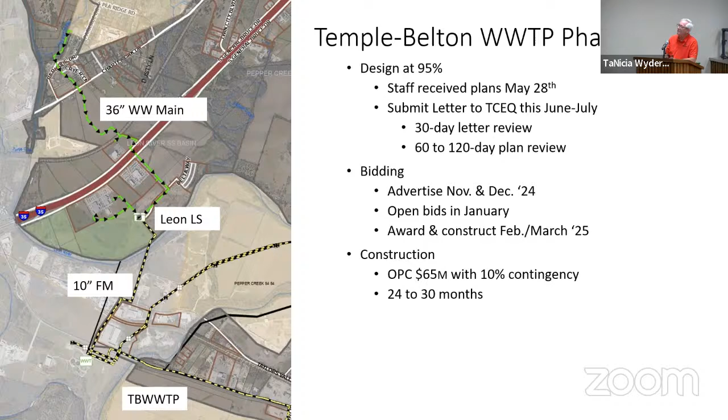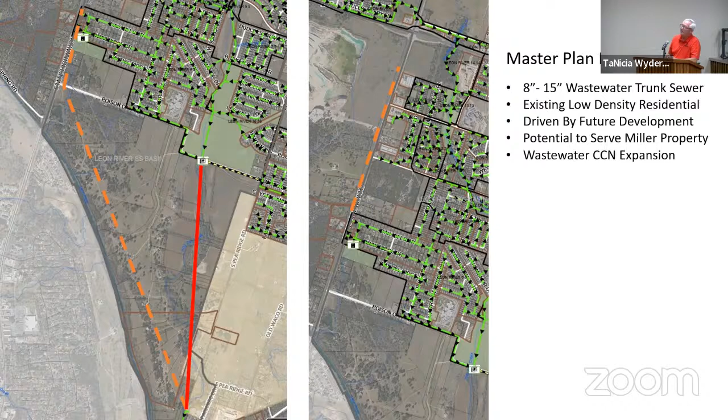So it changes the slide a little bit. You can see on the right-hand section portions of that property with the quarry up at the north end. One interesting thing about that ranch is only part of it is in the wastewater CCN for the city of Temple, and the reason is the topography. As you know, 317 is pretty much a dividing line for flows. If you're on the west side, it flows to the southwest and enters the river in a different portion, and doesn't really flow into the area shown on these exhibits.

And we had a wastewater project planned for this section, and then another one that extends north of Prairie View along 317. And that north section would serve what used to be the Bailey subdivision, has a different name now that's proposed, Preston Hollow. Now the lower one, the Lastovica property, we started design on that and started property acquisition.

We stopped because they weren't ready to develop. They wanted that line to go around their property, which didn't make any sense because it wouldn't provide any service. So we put it on hold pending future development on the Lastovica property.

I tend to go fast, so just slow me down if you want me to slow down and add any detail.

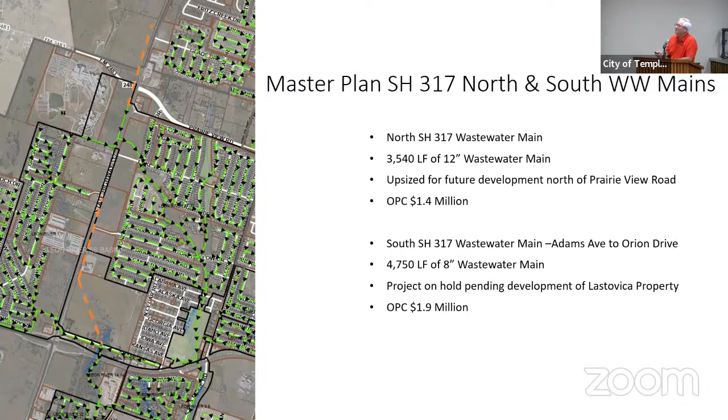This is in reference to the study I was talking about earlier. There's two subdivisions, North Pointe and Preston Hollow, that have plats in for approval. Actually, we have construction plans that are being readied to submit. You see the area of future development on 2483, and to the south, some more future development.

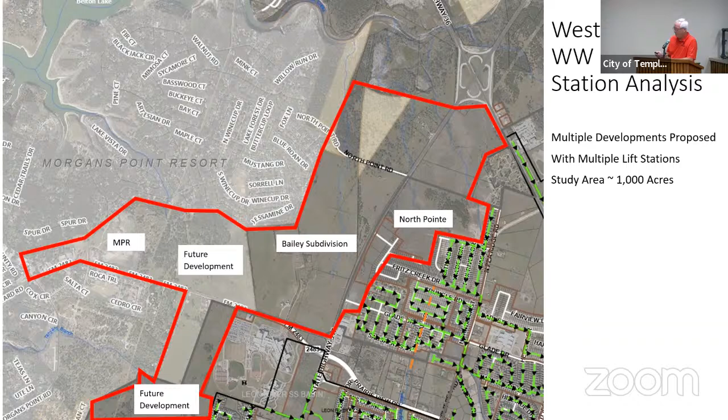And the interesting thing about this is we've been talking to Morgan's Point about providing service for their commercial area, their downtown area, so they can fully develop and their quarry could develop. And this whole study area is about 1,000 acres. So the study really looked at lift stations and how do we serve all these different areas.

And what the analysis did is, if we put it all in Leon, what would we need to do? If we put it all in Pepper Creek, what would you have to do? Or if we split it, what would happen? So the study ended up recommending putting everything in the Leon because it's better suited to handle the additional flows and requires less improvements than Pepper Creek.

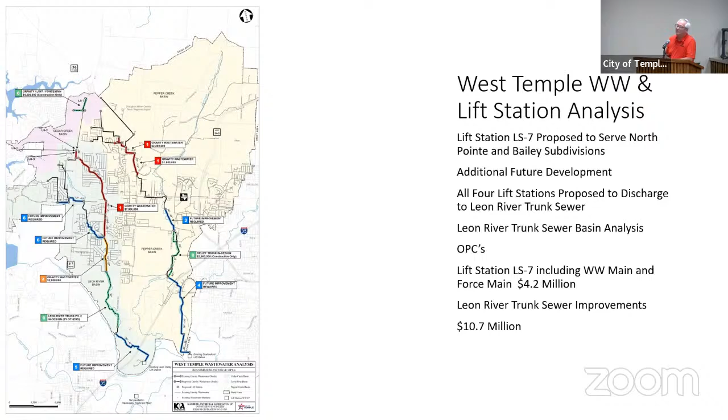I stuck this slide in last minute because it shows what I was speaking to earlier about dividing the directional flow from the basins. It's hard to see, but that is the 707-acre ranch property that it bisects. So everything to the left of that blue line heads in a different direction, off to the southwest, and anything on the east side can flow to 317 and be captured in our system.

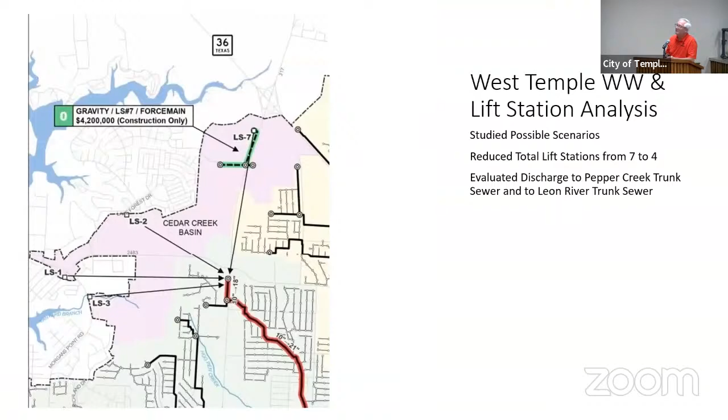So that was very quick. Any questions or anything you want me to go back over?

Was any of that study or analysis done during these last couple heavy rainfalls that we've gotten this year? Granted, that's an anomaly, but did we still get a lot at one time? I've only been here for 5 years, and every time it happens, we always have an issue somewhere. So was that evaluated during this process?

Yeah, so what happens with a lot of rainfall is I&I, infiltration and inflow, gets in the sewer lines and contributes to the flow. A few years ago, there were some flow measurements taken in a lower part of this basin, primarily from Poison Oak South, that quantify the effect of rainfall on the wastewater system. And those numbers were incorporated into the analysis that's just completed. So, yeah.

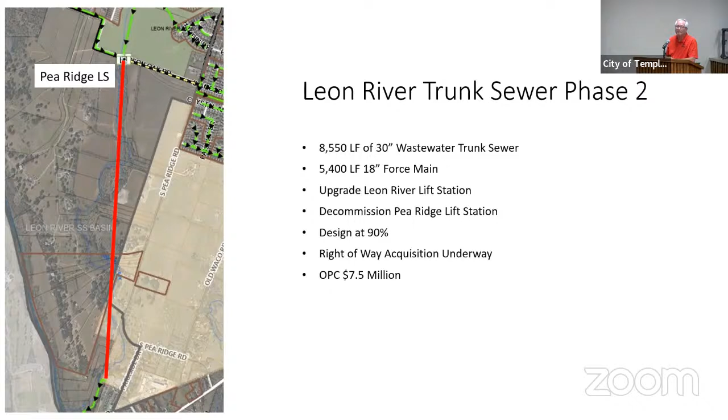Outside of this particular presentation, but it got me thinking with some of the developers seeing off of 93, I know there's some flow issues along the central point there between like 31st and 5th Street in there. Is there a master plan for anything going on in that region?

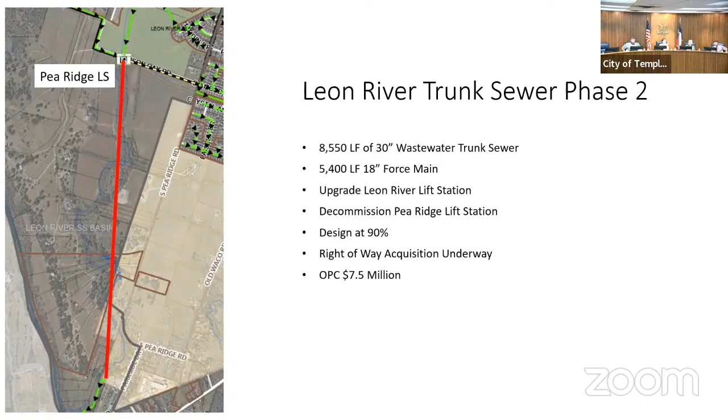The last one that came through, I think was 600 homes around the elementary school. There is, and I'll just refer back to this master plan.

So it's another one, it's just developer driven, of course, but there is a plan. Yeah, okay, I missed that on that slide, so thank you.

So given what we know is coming development wise, and assuming you guys have seen every one of those drainage flow plans, is the city set up to handle the growth that we've approved or that we've put forward to city council at this point? Or how far behind are we?

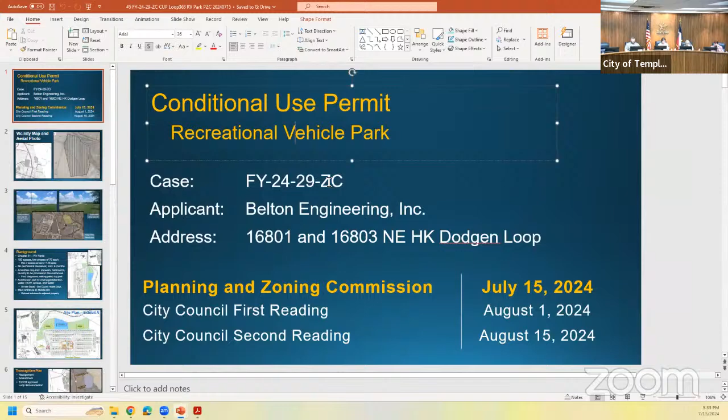Thank you, Kathy. With that, we'll move to item number 6, FY-24-29-ZC: hold a public hearing to consider and recommend action on a conditional use permit to allow a recreational vehicle park on 74.3 acres located in the Maximo Marino Survey, Abstract number 14, in the city of Temple, Texas, addressed as 16801 and 16803 Northeast HK Dodgen Loop. This case will be presented by Transportation Planner Jason Deckman.

Good evening, Chair and Commissioners. You see on your screen the council schedule. This will go to council for first reading and the public hearing on August 1st, with second reading on August 15th. As stated, the address is on Loop 363. On the vicinity map, this is located in the northeast part of Temple, adjacent to the city limits and the ETJ boundary, north of Lavandusky Drive, south of East Young, and fairly close to Loop 363.

On the aerial photo, you see that the land is not currently developed. It's being used for agricultural purposes. There's some lightly wooded areas, and it borders the creek to the east.

Normally we do site photos, but because it was located quite a ways back from the highway, we didn't get site photos directly on the property. So there are some views of Loop 363 aimed towards the subject property, and we used Google Earth to give a better view of the surrounding area. To the west is the Oak Ridge subdivision, which is under construction. You've got Hector Garcia Elementary School south by Lavandusky Drive. And to the east, it's mostly agricultural land or homes on large acreage. And again, there's that creek, that drainage, that flows along the backside of the proposed RV park.

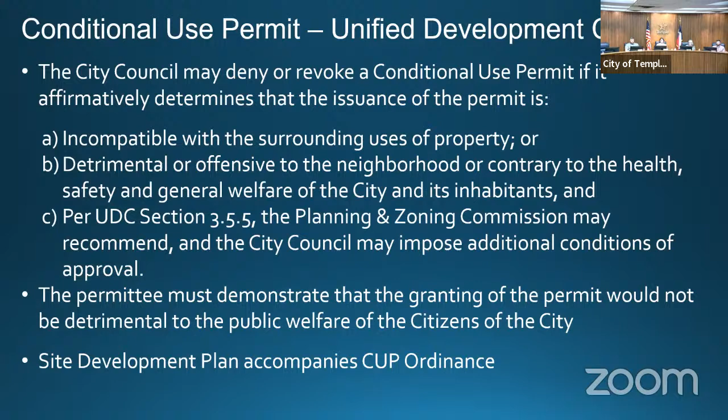We do have a few conditions with the CUP, and the permittee must demonstrate that the granting of the permit would not be detrimental to the public welfare. There is a site development plan, which you've seen. So to summarize the compliance, the answer is yes, it's compatible and doesn't impede other normal development.

Adequate utilities, that's partial. Obviously that's going to be a long water line they'd have to construct, but it would be at their expense. The connection is available there, and it does allow for safe and convenient movement of traffic, odors, directional lighting, and sufficient landscaping.

Staff recommends approval of the conditional use permit to allow a recreational vehicle park at 16801 and 16803 Northeast HK Dodgen Loop, subject to the following conditions. I'm going to take a drink while you read this briefly.

As you can see, number one is ongoing compliance with Chapter 31. Our code compliance folks are out there every day keeping an eye out for violations, and if there are complaints that would cause a conflict with Chapter 31, they would certainly become aware of it.

Compliance with the site plan that's shown as Exhibit A. If there were major changes to that site plan, that might be something that would come back.

As stated, they will be required to have a subdivision plat prior to getting any building permits to start constructing the RV park, which would include the septic designs, the drainage, any right-of-way dedication, and approval from TxDOT. There will be a note on the plat referencing this ordinance, so there's no confusion.

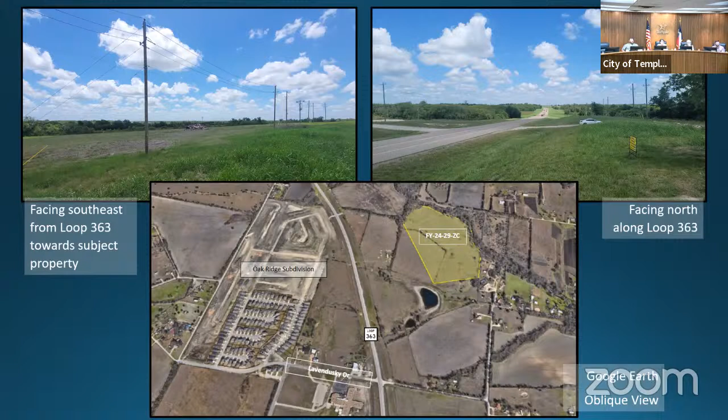But can we make a condition? Potentially. I think we could - I'm gonna look at the attorney. Yeah, I don't think so. I think that's regulated by TxDOT.

Well, and I'm just gonna think out loud here briefly - because what they'll evaluate it for is sight stopping distance, the speed limit, and spacing from any other access points, which really there's none right now. There's some driveways that connect off for the agricultural lots.

So I think we could make a condition, but if I was gonna make a condition, I'd want to have some code basis to make that. Again, I'm a planner, you guys aren't, but it should be something that would be objectively enforceable to say put that entrance where it's safe, which is what you're trying to say.

I'd argue that the TxDOT access standards are going to do that - it's going to be reviewed, and if it does warrant those turn lanes, they'll be instructed to add those. I assume TxDOT consults the city when that impact analysis goes through, so you can say hey, yes, there's a development, there's potential commercial coming in across the way. So they're not oblivious to that.

And I say that because when I talked to TxDOT at the I-14, a lot of them weren't aware that the big development at Bend of the River was potentially coming in through all of their plans, and they were like, oh, well, that's not good news.

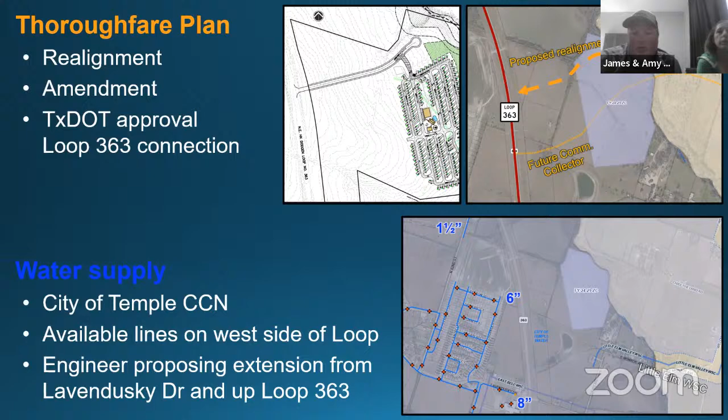It's just one that I'm concerned with, innocent patrons. I know fences help, but I just know that there's going to be problems back there.

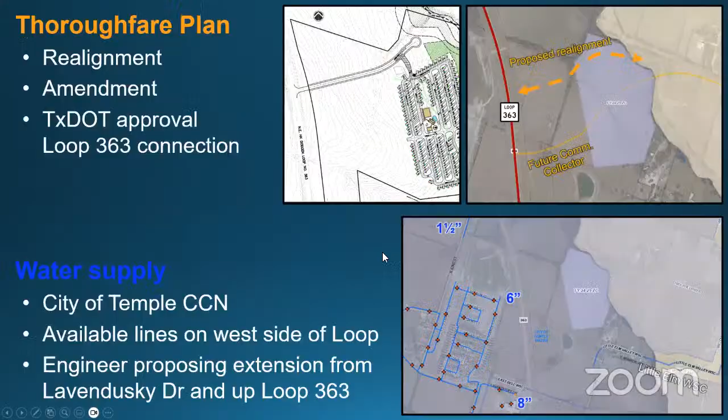Good evening, everyone. Can you hear me? Yes ma'am. Jason, would you please put the site plan up? Would you please display the site plan on the screen? There you are.

Yeah, so first of all, Amy and James, thank you for your email and concern, and I do agree with you. I know exactly about the cliff. I know what's there. We've driven the property multiple times, and I've seen it. I know exactly what you're talking about.

I want to say the first point is that between your property and the RV park, there is quite a bit of area that is left green, so at least to provide some buffer. The reason the road is shown where it's shown is because of the city thoroughfare plan, and that came from discussing that with the planning department.

About the cliff, as you see, that area highlighted in green, that's a septic field, so that area is going to be double fenced. Not only is the RV park going to have a fence around it, because we don't want anybody roaming in the septic field, but the area in the back of the septic field, between the septic field and the creek, will also be fenced. If the commissioner is willing to add that as a condition tonight, that will not be a problem at all, because that's what we're going to be doing, mainly for safety. No one is going to have access to that creek, so no one can be trespassing through the creek, because we are not providing access to the creek at all. We are maintaining all activities and amenities within the park itself.

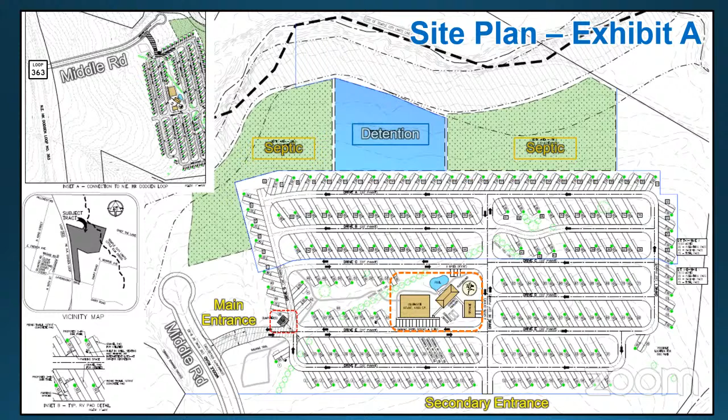Make sure I understand — if there's a significant change, that brings this back before the meeting for the conditional use permit. But regardless, there's another plat that's going to come before us for this piece. Correct. If they come in with the subdivision plat and the septic designs match this, more than likely — I'm hedging my bets here.

No, it would come back before us because there's a dedication of right of way and extension of utilities. The lawyer's nodding her head yes, so I've got it right. So you would see the plat — there's another discussion to be had for this prior to even approving to move forward. Yes, sir, this is just that.

For the Halversons' benefit, there's a difference between a rezoning or conditional use permit that requires a public hearing, and the plat, which does not require the public hearing. Right, and y'all in the past have taken questions from the public, but the law and code doesn't require that same public hearing or notification for the subdivision plat.

I'm not seeing anyone else with hands raised — going once, going twice. We will go ahead and close the public hearing. Commissioners, if there's no more questions or comments, I'll entertain a motion.

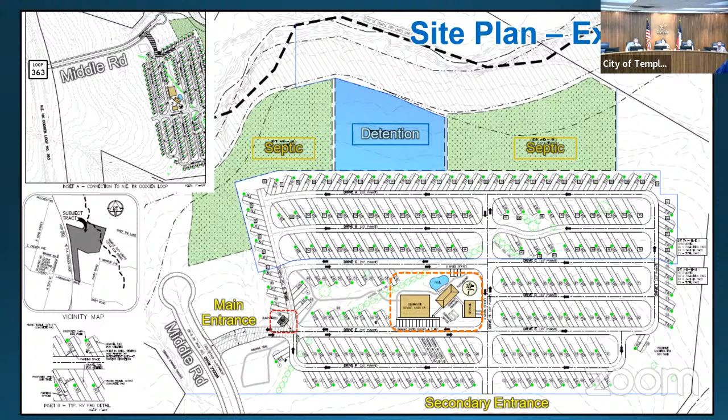I'll make a motion to approve FY-24-29-ZC with the conditions presented by staff, and add conditions where there is a 6-foot minimum perimeter fence around the RV space of the park, and an 8-foot chain link fence around the perimeter of the property being used, that includes the septic fields and detention pond. Does that make sense, legal?

Privacy fence. Yeah, okay — I would just say fencing, material, something. Okay, 8-foot approved fence. So an 8-foot privacy fence around the RV area, just privacy fence is okay, correct? Yeah, I would leave it vague and just say fence. I wouldn't even go so far as to say privacy — I would just say fence. Yeah, right, okay.

So I'll redo that. Make a motion to approve FY-24-29-ZC with the conditions presented by staff, adding the condition of a 6-foot perimeter fence around the RV space of the park, and an 8-foot perimeter fence around the entire facility, specifically where the septic and drainage fields are located.

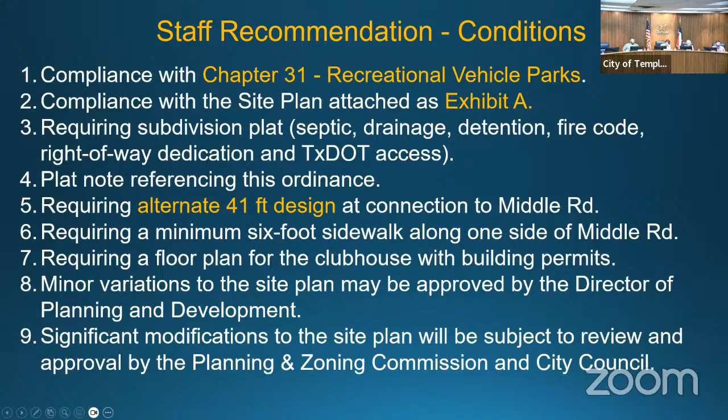I think we can work with that. Okay. Thank you. One second, I'm making notes, I'm sorry. I am too. I'm just going to add it to this right now so I don't lose it.

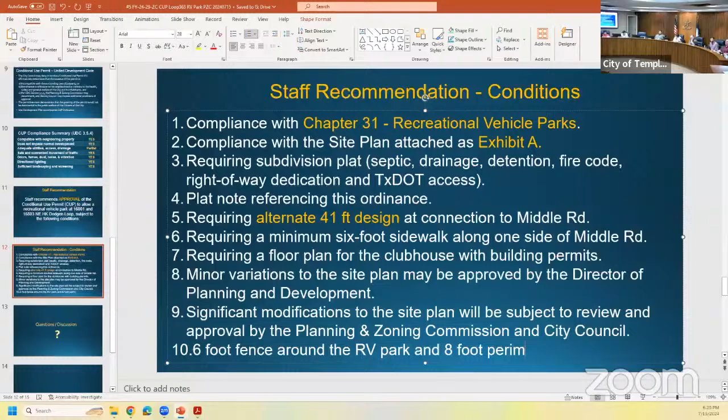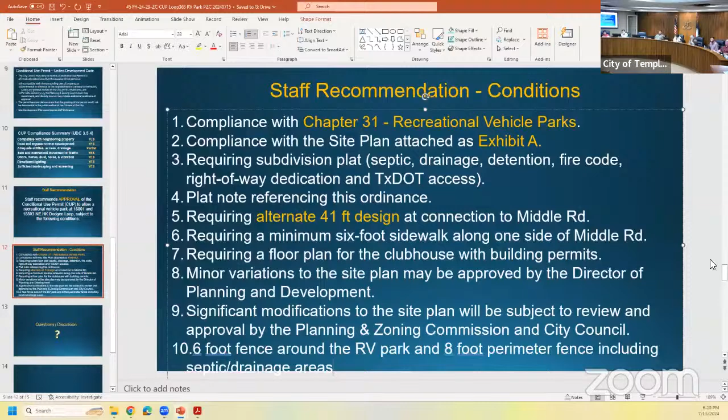JD knows what a PowerPoint Ranger is, and I'm one.

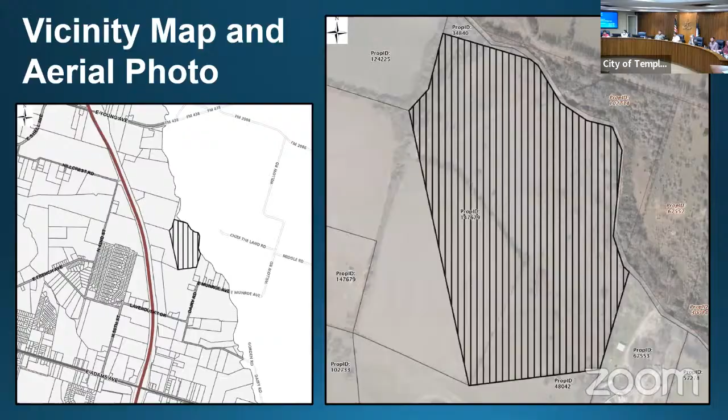A motion has been made by Commissioner McBride with the added conditions of a 6-foot fence around the RV portion of the park and an 8-foot fence around the property boundary, specifically around the septic and detention fields. That motion was seconded by Commissioner Krause to recommend approval of FY-24-29-ZC to City Council for the initial recommendation from staff.

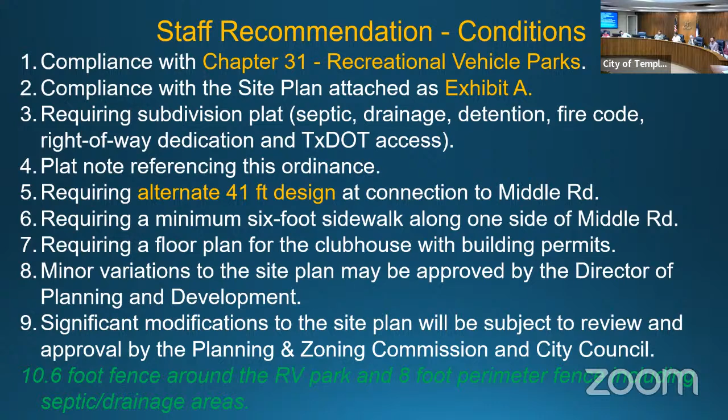May we have a vote, please? Commissioner Morales, aye. Commissioner Walker. Commissioner Krause, aye. Commissioner Smith, aye. Commissioner Jeans. Vice Chair McBride, aye. Chair Marshall, aye. The vote is unanimous and the motion carries.

Thank you, Kathy. You're welcome. Having no further business, we will close the meeting at 6:21.